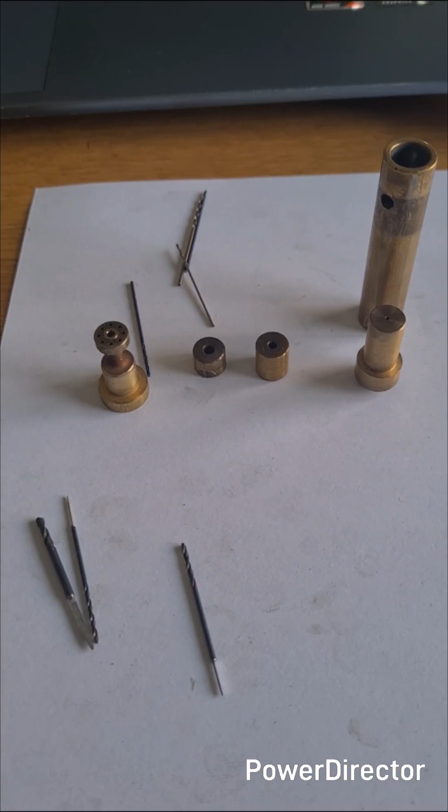It turns out that the back pressure valve, which I was using, a back pressure of 170 psi for a boiler pressure of 150. Now I kind of worked this out because, you know, friction in the pipes and raising the ball valves and all this. I wanted a 15% over, so that came out to 172.5, but you know, can't quite see that on the gauge, so I just went for 170.

It turns out on the actual engine, when I measured it, as you saw, the back pressure was pretty much dead on. I assume once the injector lifts the balls, the momentum of the fluid actually makes it easier for the fluid to force into the boiler and keep the ball valve open. All the boiler's got is static pressure pushing on the ball, but the injector has dynamic pressure.

So yeah, it turns out all I needed was 150 psi, but that extra 20 definitely paid dividends to have. It gives me not only more head, but it gives me easier starting, it gives me a wider range. So yeah, this is actually the design on CAD.

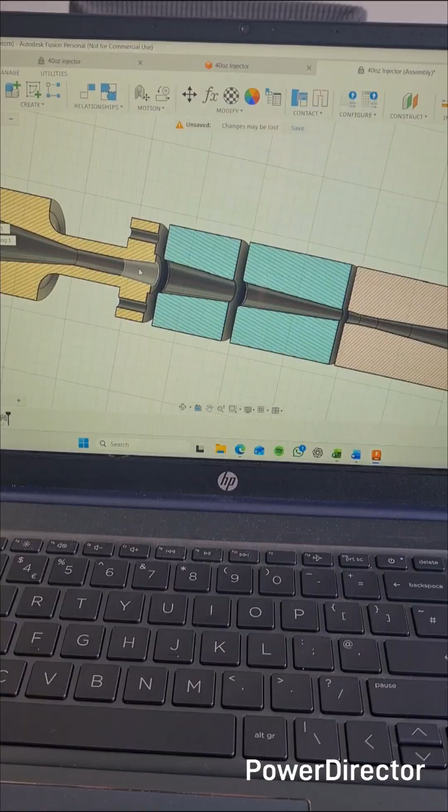Got a 13 degree included, and these are all included angles. 13 degree coming into the steam nozzle. This was from Dag Brown's. I actually needed 1.3 mil steam nozzle in the end. That was calculated using thermodynamics. And then I've got a flow straightener here. This isn't as long as maybe it could be.

It's supposed to be 4 times the diameter, but I was opening it up slowly, making it longer, but then, you know, it was working, so don't fix it if it ain't broke kind of thing. I left it as it was. The land on the steam nozzle is maybe a little bit long, but it definitely aids in straightening, as you'll see on the test rig.

Next we come to the combining cone. This ended up being 8 degrees. You can see I have chamfered the inlet slightly, but hardly anything. I mean, the actual nozzle is hardly chamfered at all. And then on every outlet I've done an absolute tiny radius, which stops any shear layer forming or reduces any shear layer.

Now we come to the condensing cone. I've got the Linden Secret, as they call it, on here. All it is is a slightly larger radius entering. It's just to stop any splashiness, because when the water and steam are mixing in this cone, it gets to the end of here, it's still not fully condensed, nor should it be, because it's still got this whole length to go before it condenses. It means that you're going to have steam which wants to expand as soon as it meets this area.

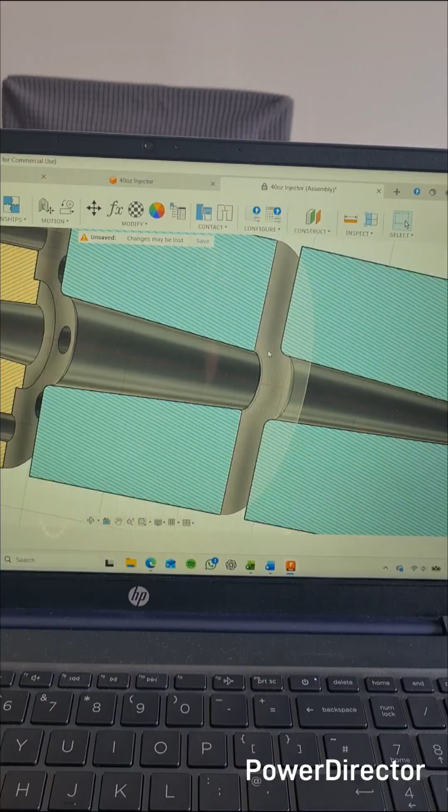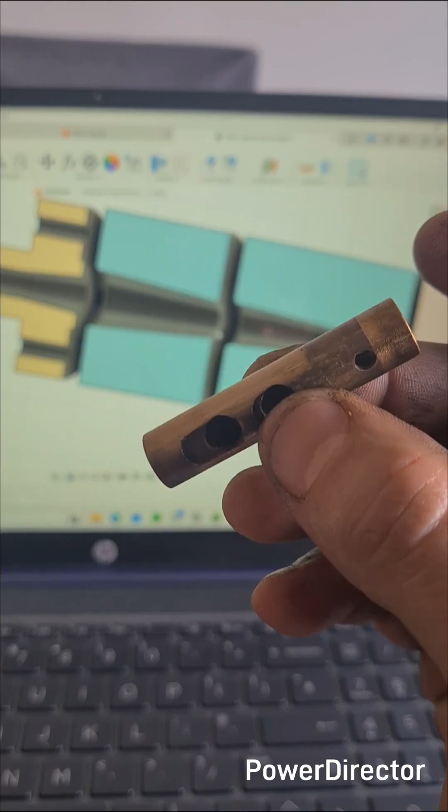This is the overflow 1 gap, which actually meets this hole here. When the injector's working, this is under vacuum, but it serves as a starting gap to allow steam to escape as the steam nozzle allows steam through here. Velocity increases. Velocity so high that right at this edge, you're capturing something around 0.8 bar, which is 0.2 under atmospheric. That draws water in. As the steam hits the water, the steam condenses extremely rapidly, causing even more vacuum, which self-perpetuates the inlet.

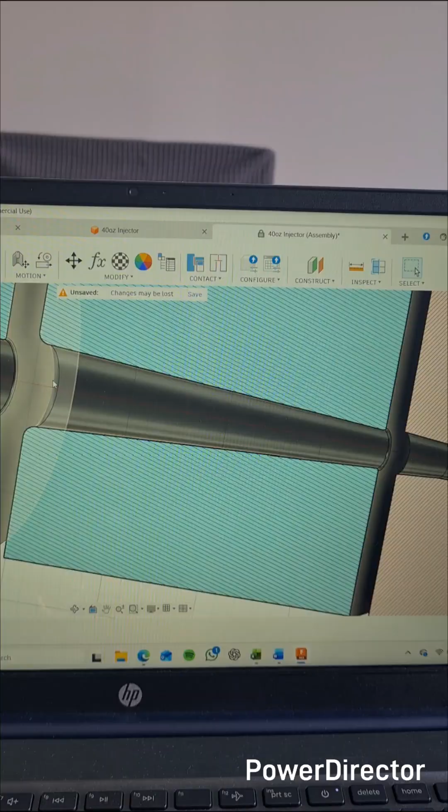But yeah, there is still steam at this point, so it does want to expand, so this Linden Secret just helps capture that. The condensing cone is, as you can see, quite long. A lot of books that I've read, a lot of literature say that this entire section wants to be between 4 and 12 lengths of this diameter, which is the condensing outlet. So that's easily that. And at these high pressures, it really does need it. 150 psi really did need that length to get the steam condensed fully.

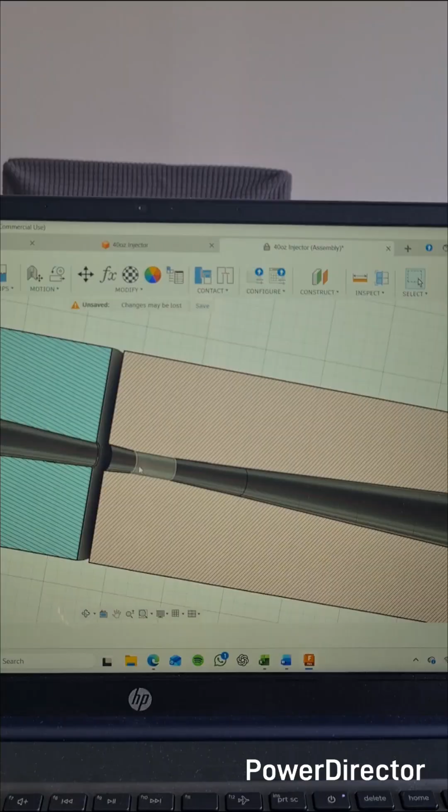Temperature I have on outlet is around 75 to 80 degrees, which via the maths shows that the steam is then fully condensed and the water's done its job. Next we come to the diffuser. As you can see, I've got a small 9-degree inlet taper. This is completely different to Dag Brown's big bell mouth entries.

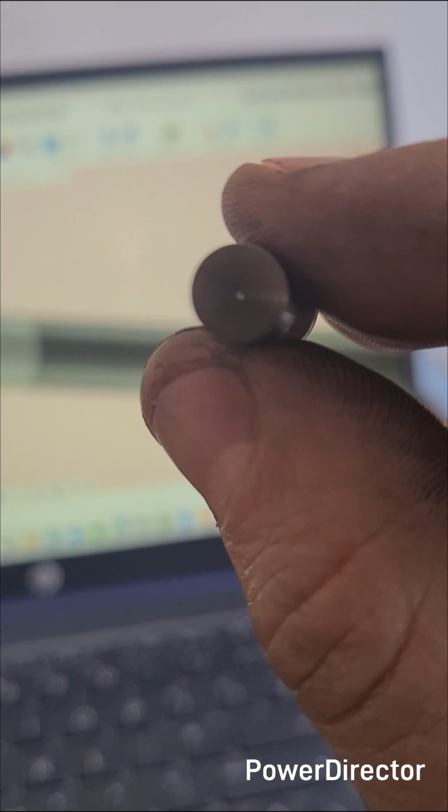You can see there, it's absolutely microscopic once you get to this end. The water, as I'll call it, because it's pretty much single phase. There's tiny pockets of steam at this point, but they've pretty much been condensed by now. And if they haven't, then they cause turbulence in here. So you want this length to ensure that steam is fully condensed before it enters this, because this is now compression. The water's moving at around 40 to 45 meters per second through this throat, which is only 0.82 millimeters.

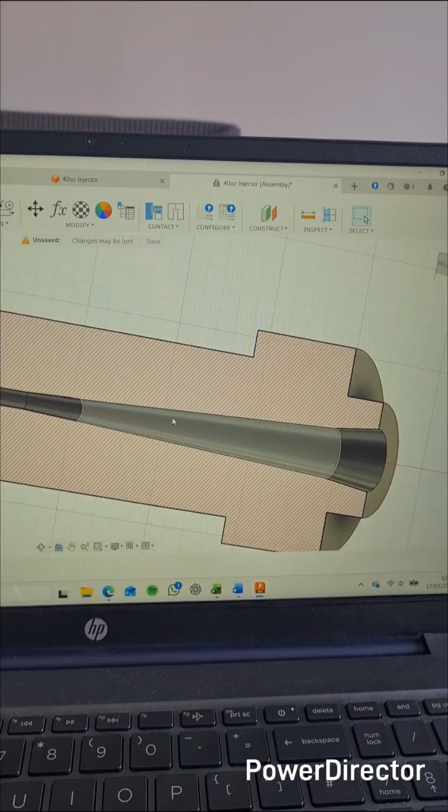We then have a 3-stage diffuser: 5 degrees, 6 degrees, 13 degrees. Strickland Kneass experiment with a radius, which for higher pressures should be up to 300 times this diameter. It's kind of difficult to make in the home workshop, so going with 3 diameters makes it easier.

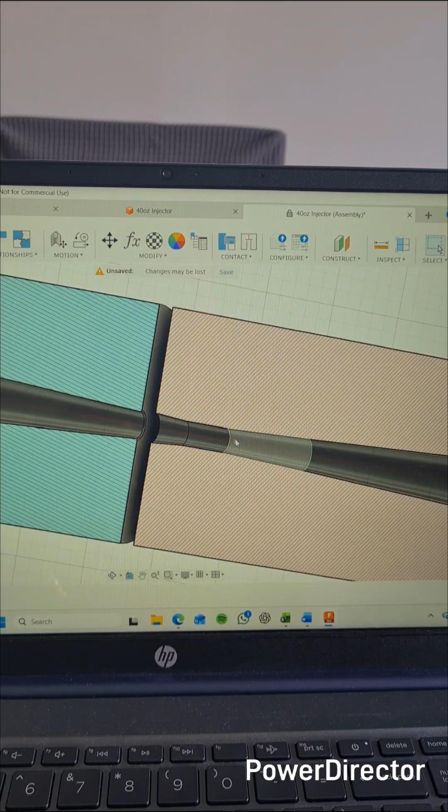It stops boundary separation. You want the fluid sticking to this wall and moving outwards. You don't want a jet coming out of here and just detaching from the wall. You want it sticking to the wall and slowing in speed gradually, so that you have a pressure front inside this nozzle, not inside this throat or in here, which with slower water you can have, and I was getting a hell of a lot of overflow coming out of OV2 here, overflow 2, which is the second hole.

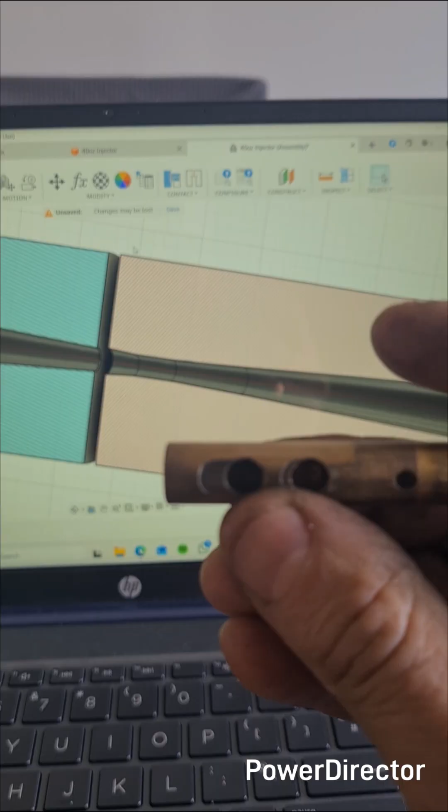As you can see, this is quite a different design, a lot longer, a lot sleeker. And this was the Dag Brown version. As you can see, he also uses annulus regulation. Nothing at all wrong with this. It just means that you are losing some of the condensing cone. All of that from there to there is lost length, lost condensing potential.

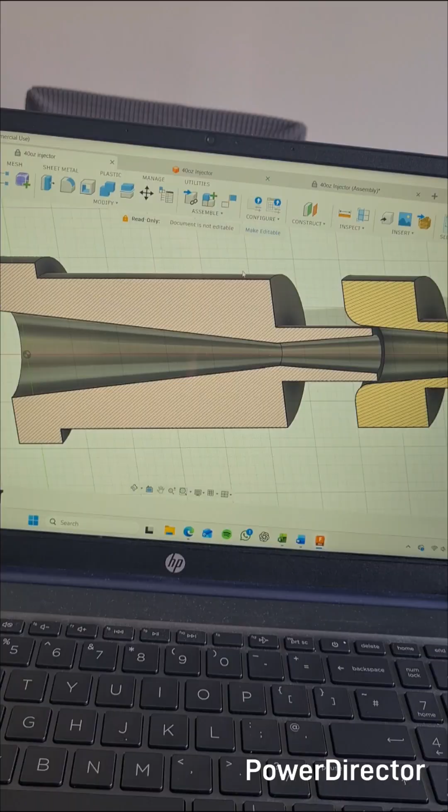Also, trying to get this bore lined up with this bore when you rotate it. Even if you clock, you turn all this, that's all great. This bore is perfectly concentric to this, concentric to this. As soon as you flip it round, this is no longer concentric. Even with the 4-jaw, you can clock in on this end, clock in here. It's still not going to be perfectly concentric with this bore.

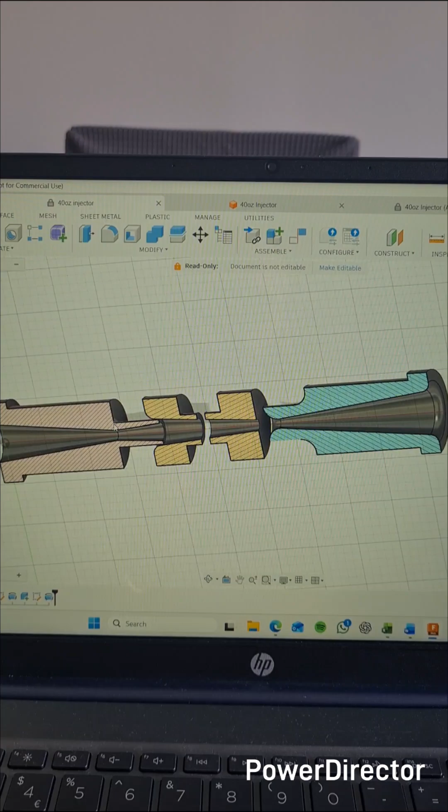So this can be 0.01 millimeters offset, which does in fact cause the steam to exit at an angle and hit the water at an angle. When it comes out of this nozzle, it will be at an angle. Now this is why Dag Brown uses a larger radius bell mouth entry. It's because on these lower pressure injectors, the steam will be at as high a velocity, but the water coming out of here won't be. You don't need as high a velocity to beat the boiler pressure.

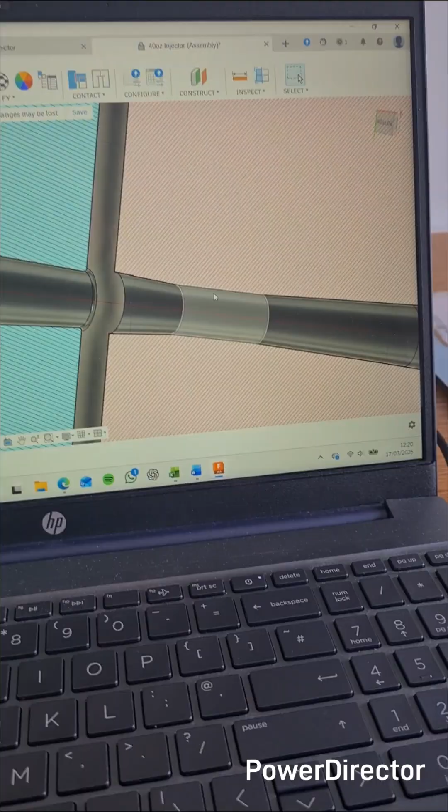And so not only is the jet not at such an angle, but the diffuser bell mouth can capture it easier. Now, why haven't I used a diffuser bell mouth? Well, as the water's exiting here, any gap between the water and the wall is actually causing a vacuum. So you're drawing air in here. And this causes air entrainment. You're trying to compress a fluid, you're getting air entrained, it becomes more compressible, I should say. We don't want it to be able to be compressed. We want it to be raising in velocity, not compression.

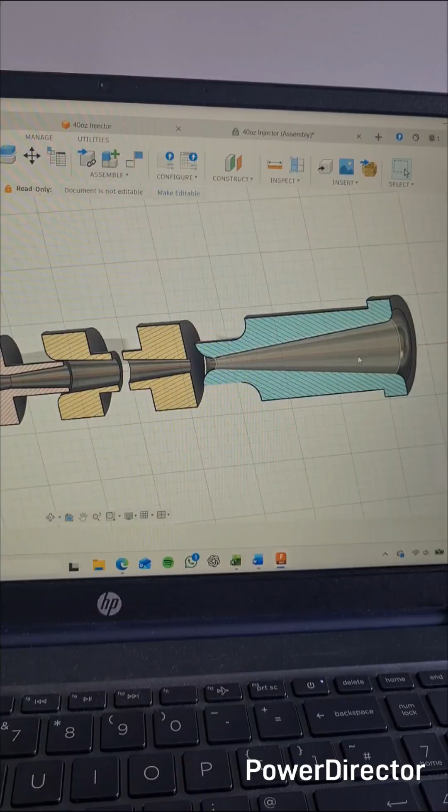However, with 150 psi, that 30 psi makes such a difference. You can have more heat for the water to condense. The steam's still going to be moving at a similar rate of knots, as I've shown in the maths.

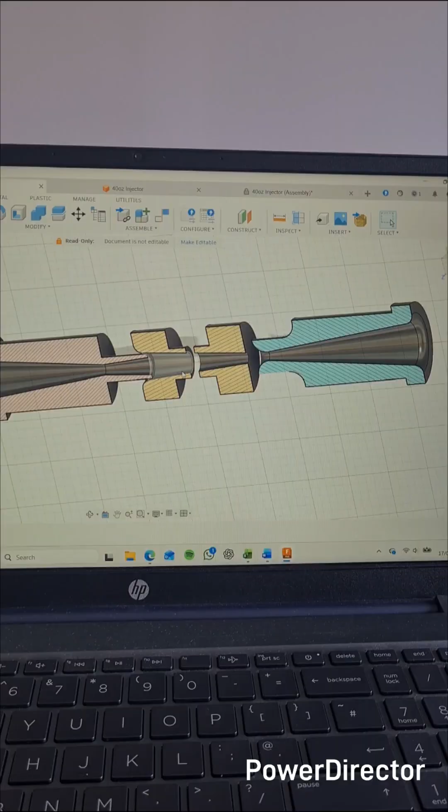Which, if anyone's interested, I can show. But I'm actually writing a book at the minute on all of this, how the maths designs the steam nozzle, and from that how you get the condensing lengths, and then how you need to size the diffuser nozzle. It's amazing to think that 1.25 litres of water can flow through a 0.8mm hole in a minute. But there we are. I suppose when it's moving at 45 metres a second, it will do.

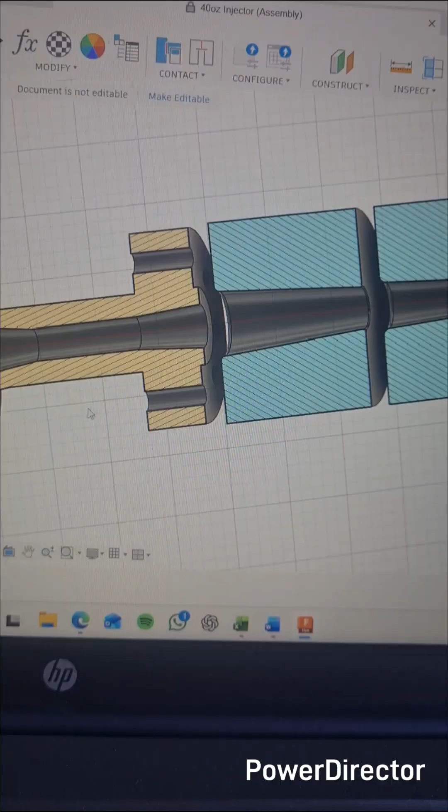In summary then, when steam's on this end, it's very high pressure, very low velocity. As it moves down this cone, the velocity increases, pressure reduces until it hits the steam nozzle. This is where the steam will be doing Mach 1, so that's the speed of sound in steam, and this is called a choke nozzle. This means that nothing you change past this point will change the velocity through this nozzle.

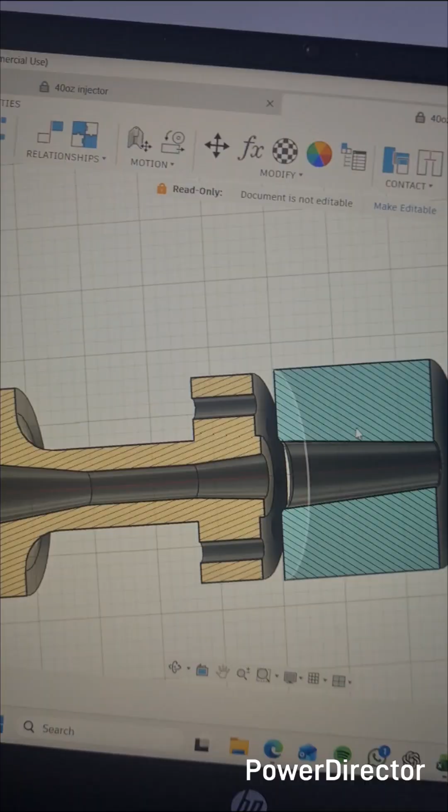So nothing downstream, no extra water, no change in water temperature, no change in gaps, no difference in angles will change how fast the steam is moving through this nozzle. And that will be Mach 1, which is around 450 metres a second. Now that won't reduce your pressure enough to actually draw a vacuum at this point. You think you're at 150 psi at this end, which is what, 11.5 bar. By here, the maths says you're at around 6.5 bar. So you've halved in pressure, but you've dramatically increased the velocity.

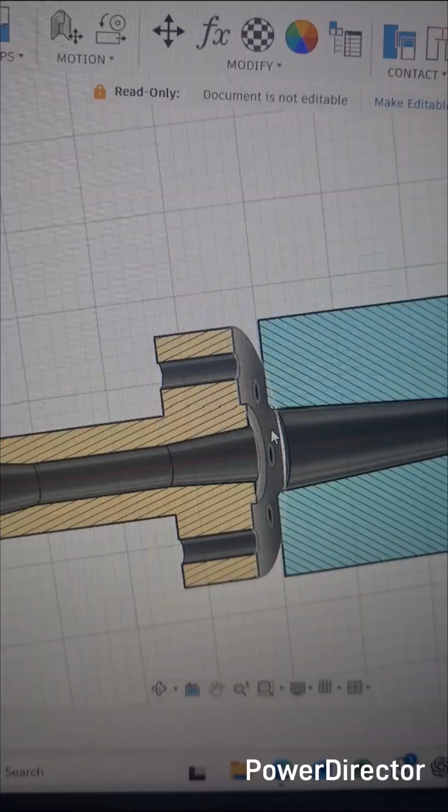Now the flow straightener, this is what this does. It allows the steam to expand, raise velocity, and drop its pressure more. This means that, as I've said, at this point, right on this edge, the steam will be moving at around Mach 2 to Mach 2.5. That's 2.5 times the speed of sound in steam. And this is why you get just under atmospheric pressure at this point. That allows water to be dragged up or lifted into this axial gap.

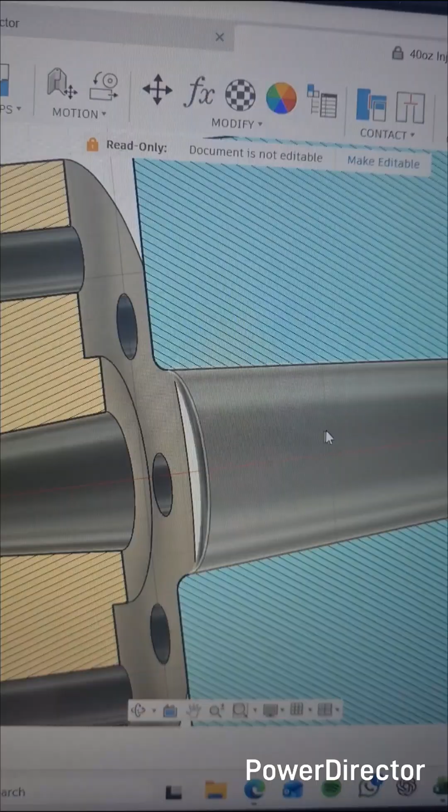And then, as obviously the steam hits this wall of water, it condenses extremely rapidly, causing a larger vacuum to be created. The combining cone does the initial job of combining that steam and water, so you're going to have water on the outside, steam jet on the inside, combining here. If you didn't have the condensing cone, you'd see a very hot jet of water and steam exiting here.

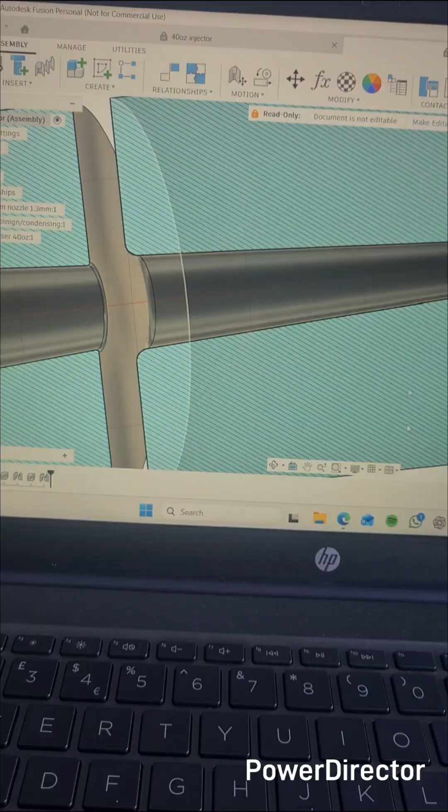The condensing cone then does the final condensation and also carries on raising the velocity, because the steam now is losing its velocity to the water, but the water obviously is taking up heat, and Newton's second law means momentum must be conserved, so the energy has to go somewhere, and that energy goes into speeding up the water. And by the time we get to the end here, the steam and water are balanced at around 45 metres a second.

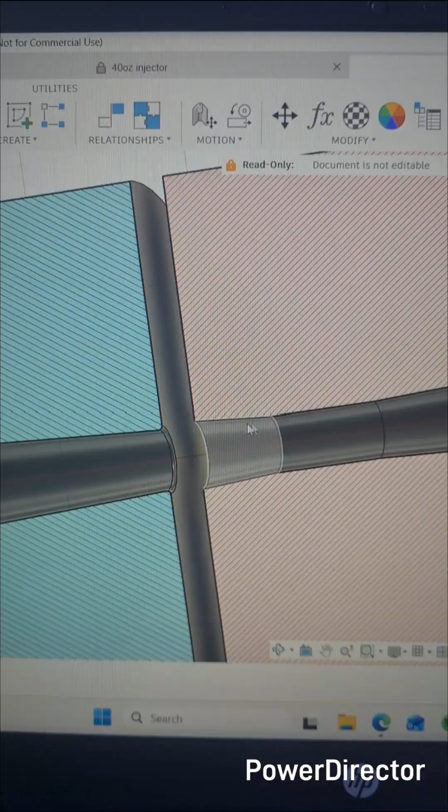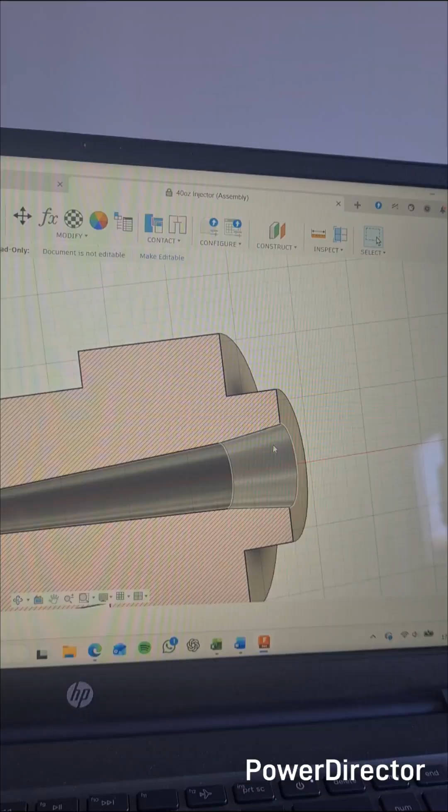As I've said before, the capture taper allows the vena contracta to contract into this space without entraining too much air, which is compressible. We don't want compression, we want velocity. And the land here allows the vena contracta to stabilise before being re-expanded. As it expands, it slows down, and as it slows down, it re-raises in pressure until the end when it goes into the boiler. If you ever try one of these, be prepared to make some of the smallest tooling you've ever made in your life.

These are D-bit reamers. This was a 0.78. This was a 0.8. And then this was a 1.3. You can find reamers online on a place like Cutwel, but they're going to charge you 30 quid a reamer for something like a 1.3. Even more expensive for a 0.8.

So I got the Dremel on the lathe and made my own D-bit reamers, and yeah, done a really nice job. Also, as experimentation goes, I made a hell of a lot of tapered reamers. I actually found that grinding old HSS drills is the way to go, rather than trying to turn ones like this.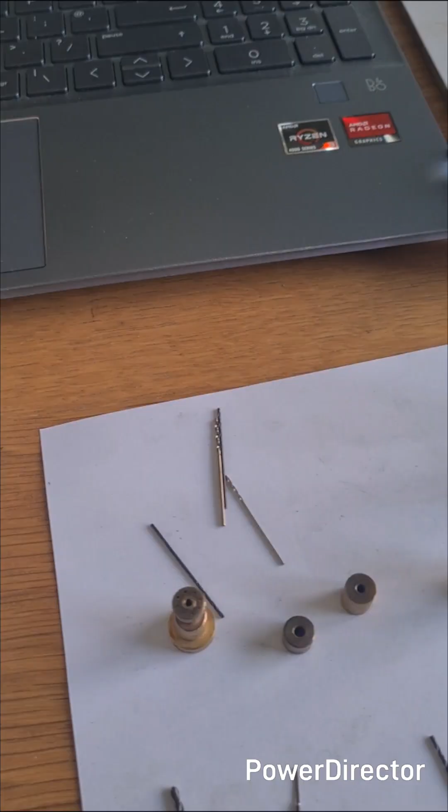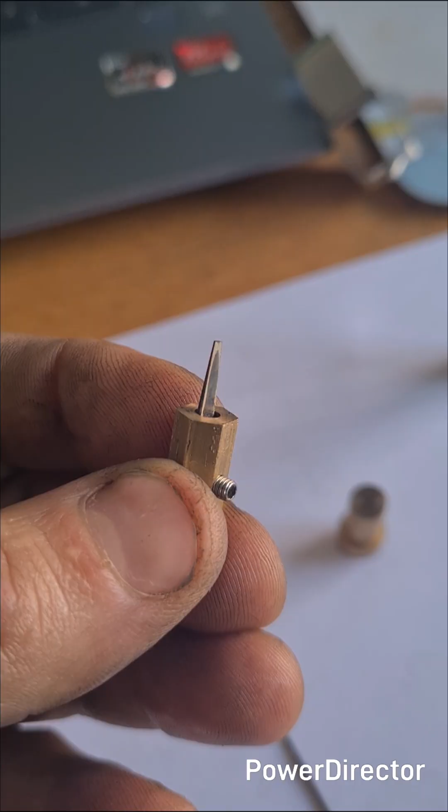This is good for bigger ones, but when you get into the much smaller sizes, an HSS drill ground at an angle is far better, it's far superior.

Something else people would be questioning on this is the steam nozzle, why I've got these holes surrounding it. Well, this disc is actually a water flow straightener or killer. Originally what was happening was water was entering here from one side and actually causing, I don't know what else to call it other than turbulence, and a one-sided jet, which added to the steam being offset, and caused the jet to be coming out of the condensing nozzle at an angle.

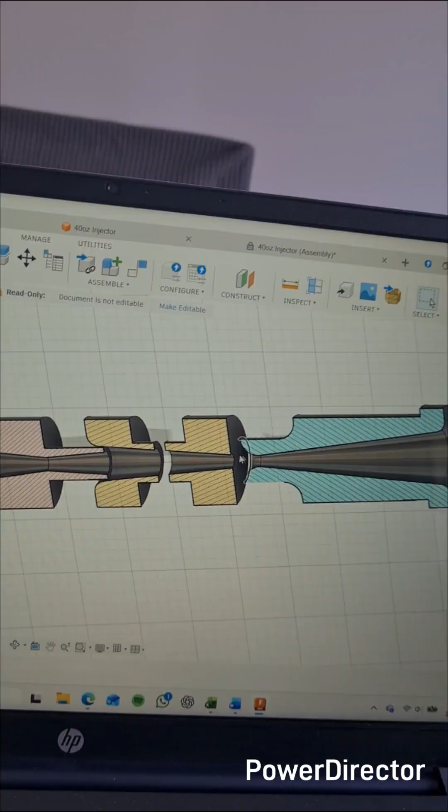Now, although this angle was only probably 2 degrees, it was the best I could measure, that's still 2 degrees offset, so when it hits the diffuser, it's then bouncing off one wall more than the other, causing more turbulence, not allowing the water to stick to the walls nicely. So when I then upped the pressure, it was even more exacerbated.

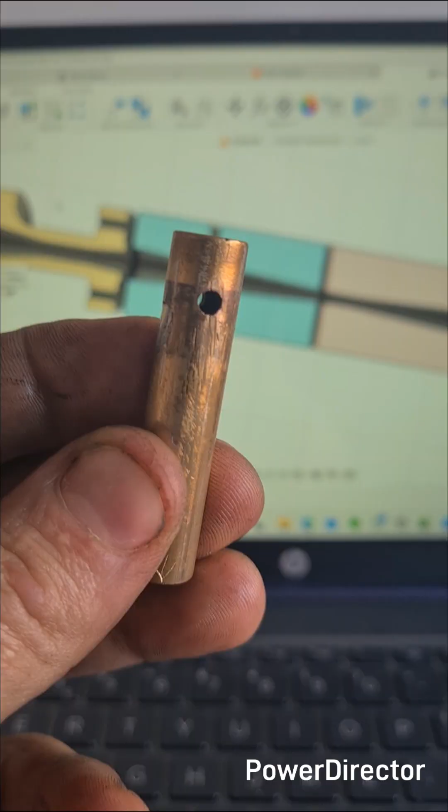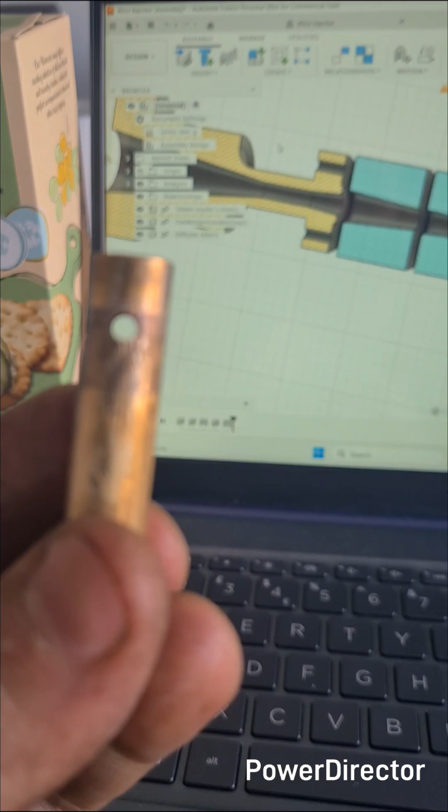So what the water does now is it comes into the injector body around an annulus and into these two side holes. Now you'd think that these two side holes would then put the jet perfectly against the side of this, but no. I think what was happening, because it comes still from one side, the jets were coming in at an angle. And you can see the old hole there,

but they were coming in at an angle and still causing, even after all this length, the jet coming out of here, because it was such high velocity, to still be at an angle, and you could see it when I had different diffuser geometries. You could see it sticking to one side of the wall there. So what I had to do was then add this flow straightener.

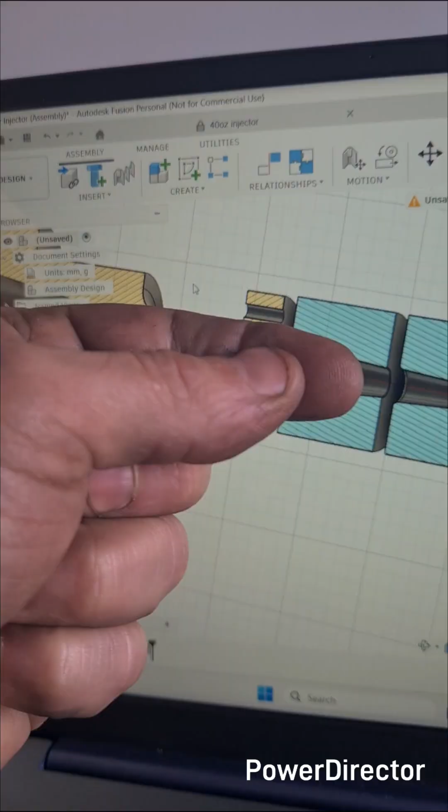So this then acts as a plenum chamber. So even if the water is coming in at an angle, it has to raise in pressure here, which then these 8 nozzles then direct the water square to the axis in 8 locations, and that has actually killed the angle completely.

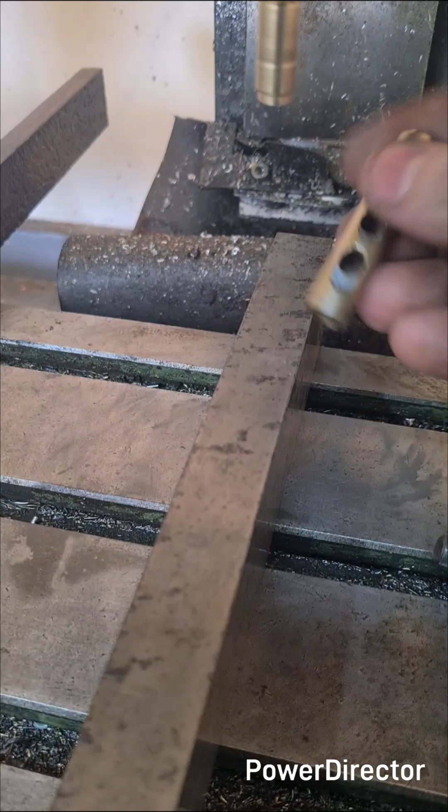It's so important when pressing these nozzles in that you keep them perpendicular to the axis or perpendicular to the walls. Even though this is a press fit in this bore, it can still press in at an angle and not be perpendicular if the face of the tool you're pressing in with isn't perpendicular to the wall, or there's a bit of swarf under here, or the tube isn't square. It's plagued me the whole way through, squareness and keeping things axial.

As you can see, pressing this in, this tool is actually a really nice close fit on. See, it's holding itself there. It's not a press fit. It's just gripping it enough so that I know that there's no axial play. So when I press this nozzle in to this shoulder, I know not only is that nozzle where it needs to be, but it's also exactly axial to the bore of this.

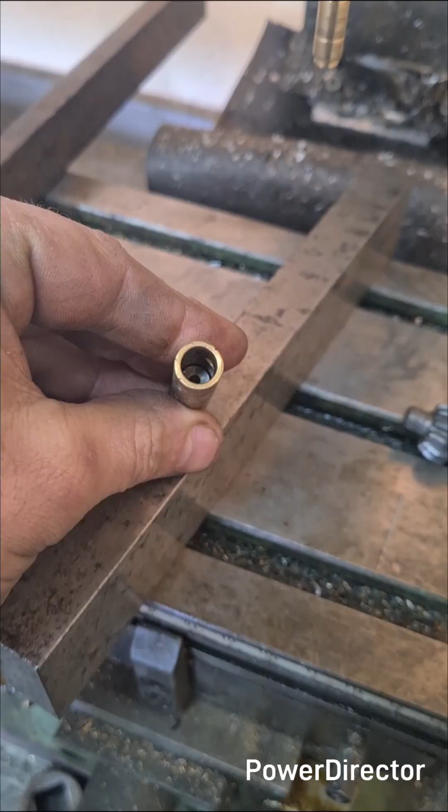What I'll often do is also give it a turn, make sure it's clean on the bottom, a bit more of a press in, give it another turn, and that just ensures that the tube is flush with the square block there, the precision block, and then I'll just push it home to the shoulder. Now I know as well as I can that that cone is square in the bore and square to the exact centre of the tube, which will hopefully allow the jet to be central too.

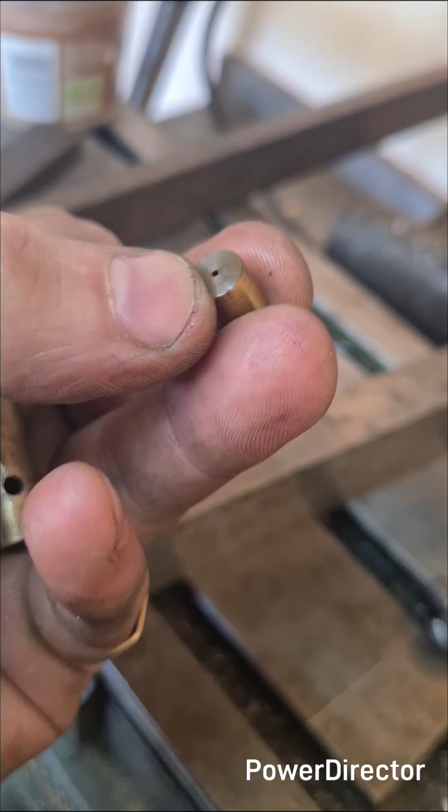Ensure the tool you're pressing in with doesn't have a completely flat face. Look, it's got a hole in the face so that when I'm pressing in these cones, it's not going to interfere or cause a burr or push over the edge of that hole. I mean, that's 0.9 mil. It's absolutely tiny and easily damaged.

The next thing to note is the gap between these two cones.

It's a little bit of experimentation, but you can kind of logic out that at this scale it's not going to be a massive gap. You're not going to have a 2 mil gap, but the gap needs to be big enough so that the initial steam can escape. I actually found that 0.8 mil is the perfect gap.

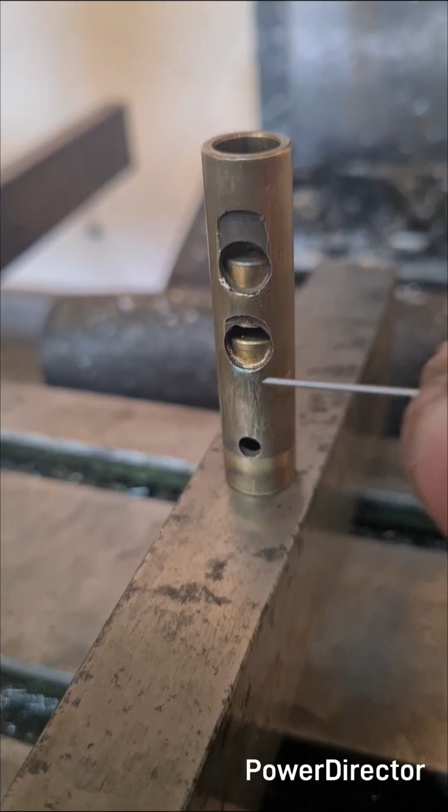The CAD model can help you with this, kind of show you that somewhere between 1 and 0.6 the angles intersect, and the angle from the combining cone allows the water into the condensing cone.

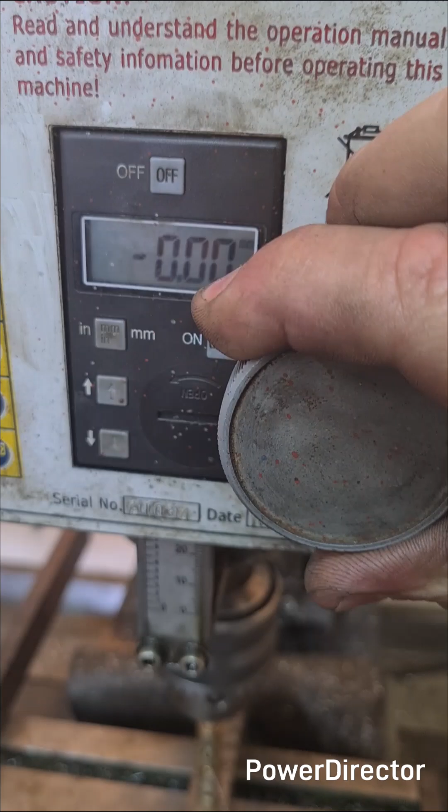So what I use is, I've got a 0.8 drill here, and that goes in there. As you can see, it's nowhere near yet, so I need to keep pressing it down until that just touches. To help me do this, I use the mill's quill feed here. Getting pretty close now. So what I'll do is I'll give it a small, and I'll give it another jiggle around.

With doing this, you can easily overdo it and grip that drill piece. And gripping this drill piece means that this cone or this cone can now be off centre, because although this is pressing this square, you've now applied force to this bottom cone via one side with this drill piece. Be very careful when pushing these in.

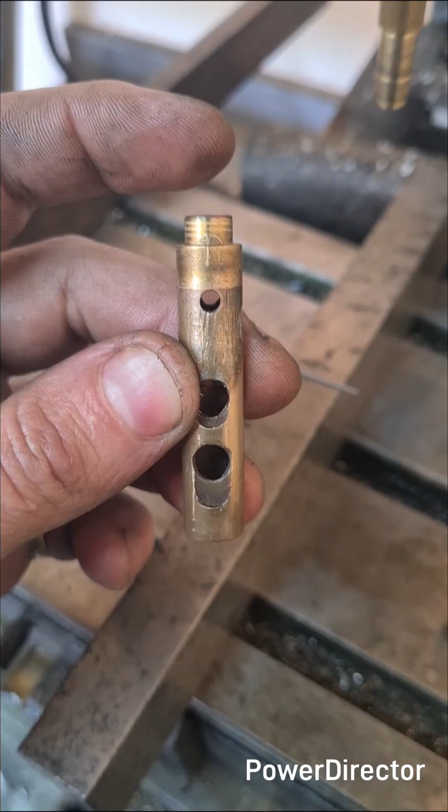Eventually you'll have to take these cones out, whether it be for cleaning or whatever. I've had to take them out today, obviously, for measurement, final checks and stuff. So just make marks where you can ensure that the alignment going back in was where it was before. That's marked, and the condensing cone's marked too. There we have it.

The 0.8 drill barely goes in there now, so I know that gap is just under 0.8, which was about perfect before. Unfortunately, there's no way to know whether you've got the cones in perfectly until you go on the test rig. Once again, when pressing into the bore, make sure that the alignment's correct.

It's easier for me because I've got larger holes into the overflow channels, but your injector may have smaller channels, which means that that alignment really needs to be perfect.

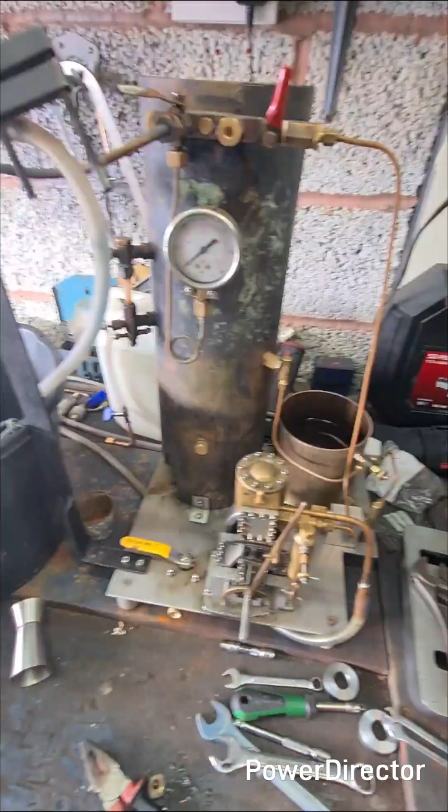So before we start, a few notes on the boiler test rig here. This is an engine I made back in college. It's a two direction single cylinder. It's simple, but I hooked it up to a small water pump. I've got feed into the boiler, so I can keep it topped up with water. I've actually rigged a gas burner, which I hook up here.

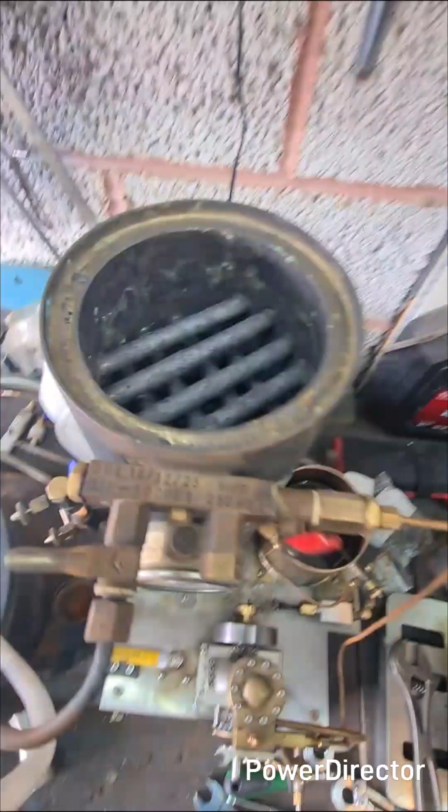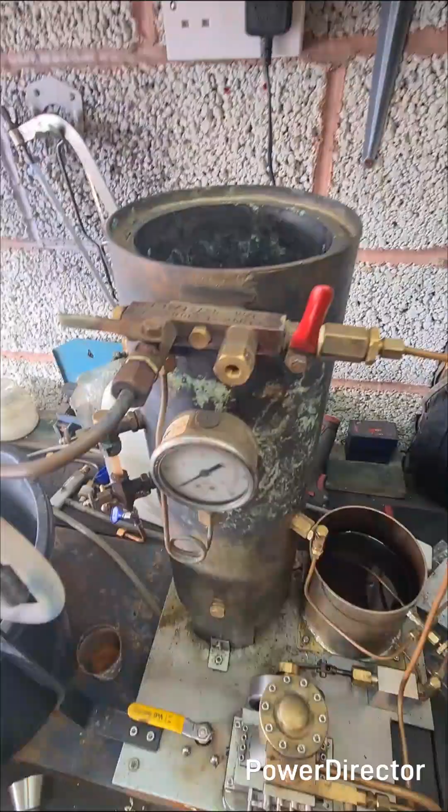It's a cross tube boiler, and when that flame's roaring, you can kind of hold your hand over the top here, so it's really efficient, effective. Water gauge, and as you'll see, I do not have a safety relief valve. I could easily fit one here or here, but for testing injectors, you don't want your safety relief valve going off all the bloody time. It's just an absolute nightmare to keep track of. You just want to be able to build pressure, set to a range, and allow the injector to test.

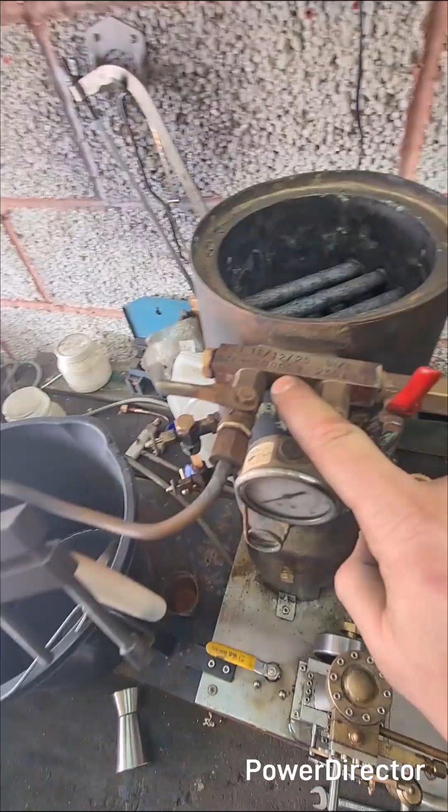Now you could probably get a safety relief valve, maybe relieving at 250 or something, but I tested this boiler up to 500 psi hydraulically, so I know it's good for at least 250, and I never even get it there via these tests. This is a 150 psi injector. The most I'm testing it up to is 170, so I've got loads of safety margin there. And I expect this thing could go up to 1000 psi easy hydraulically, probably 500 psi with heat without splitting or anything.

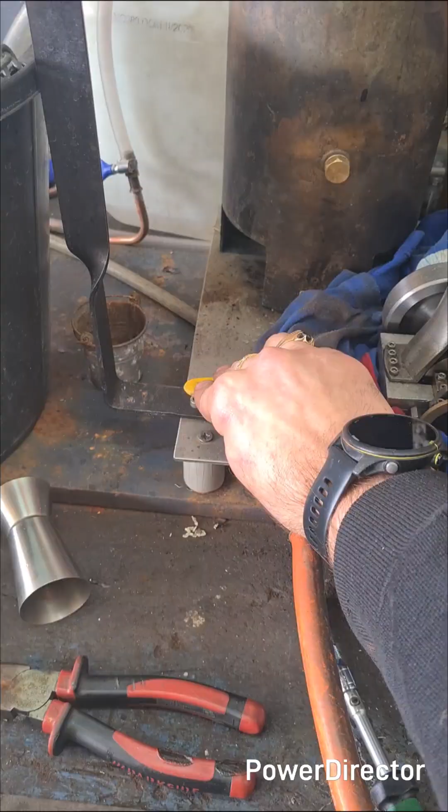So this is 5 minutes in now, 6 minutes, and we're up to 100 psi. As you can see, these valves are getting a bit old and knackered now. I just ordered them from China as quickies. I was experimenting with an upgrade, but they've done the job so far. And as you can see, I'm not really going to give it more, but there's no need.

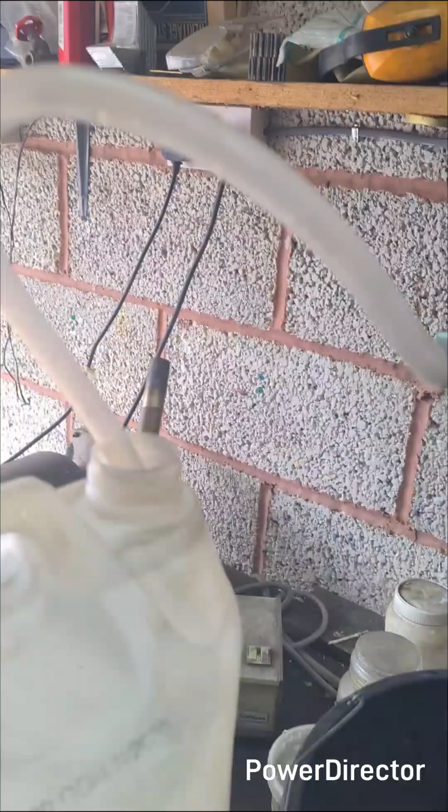We're up to 120, just about to test for the straightness of the jet. I do this just with a rule lined up with the body, and it's actually impressive how cohesive the jet that comes out of the combining cone is, really. So at 135, and to get the line primed, I usually just give it a little bit of steam now.

I'll come up to 150. This is where the balancing happens. You want to be able to balance the flame, keeping it at 150, and the steam use, so that we can leave that and then test it.

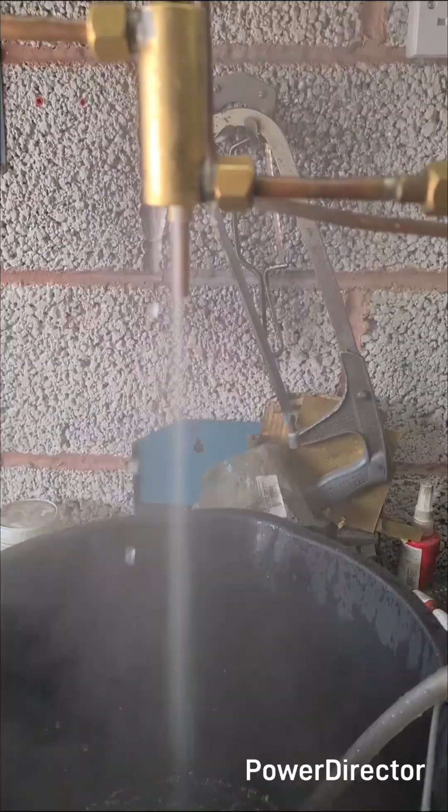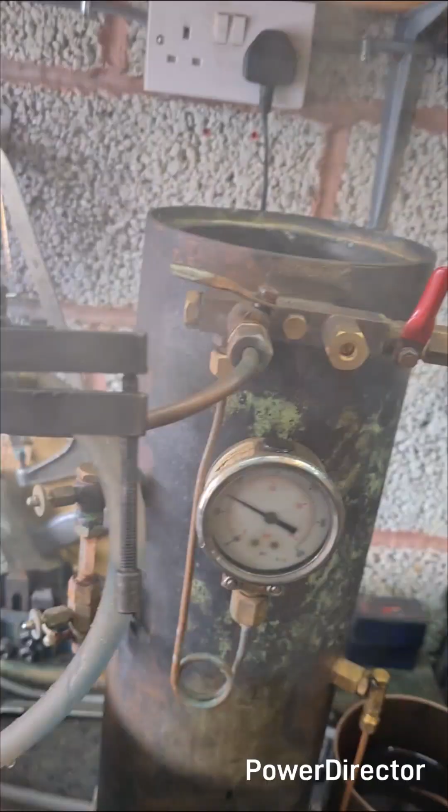See, the jet is still straight, even with the diffuser in. And most importantly, with no load, the overflow 2 was dry, which means that that little 9-degree capture into the diffuser's working. So we'll just top off the water and then put the bottom bung on and see how she fares. So I've primed the line, I'm getting her up to 150, and then what I'll do is I'll start back pressuring and see what reading we get.

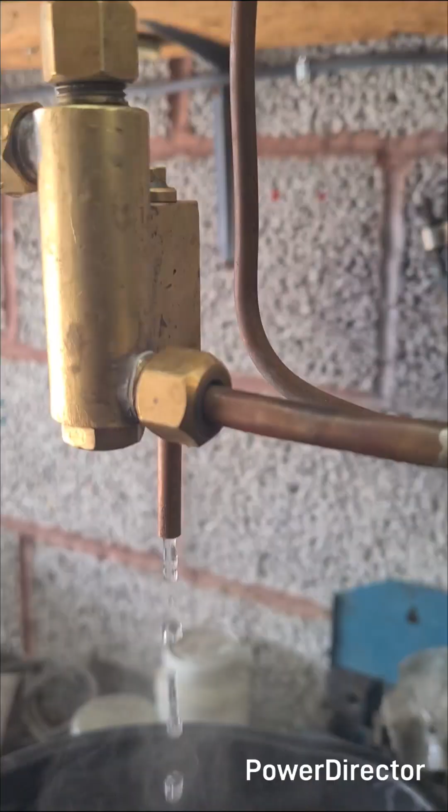This is just to hear how quiet it is. Oh my! Just so you can hear what the actual injector sounds like. It's absolutely quiet in operation. It draws the boiler pressure down quite quick, but that's the noise of it. Absolutely nothing. No chirping. Alright, we now need to top the boiler level up, so we've got the steam engine running.

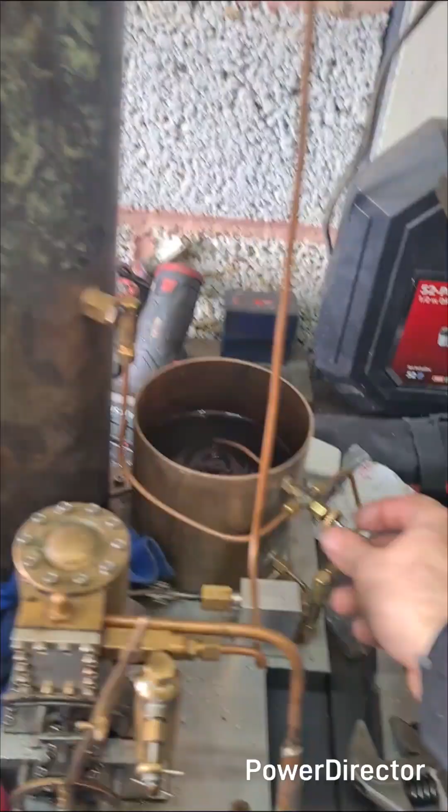Nice and slow. While we wait for the boiler to top up, I thought I'd say a bit more on the design cycle of this injector. While trying to design it, I went through about 120 design iterations. In the beginning I was trying to up the pressure of a fully working Dag Brown design. I realised after a while though that merely reducing the steam nozzle diameter wouldn't actually raise the pressure, as some might think it does. As we've seen, the steam nozzle is actually choked, it's at Mach 1.

So reducing the diameter, all that actually does is reduce the mass flow of steam, i.e. the amount of steam passing through the nozzle. Obviously less steam means less power, but I didn't realise this until later on, as I tried to make the condensing cones and diffuser smaller to match the size of the steam nozzle. What I realised in the end was that the amount of water I want to be pumped in the boiler needs a certain amount of steam to raise its speed, and vice versa, the water condenses the steam to a required level of heat. You can actually use these values to calculate the size of the steam nozzle required for the amount of water you want pumped.

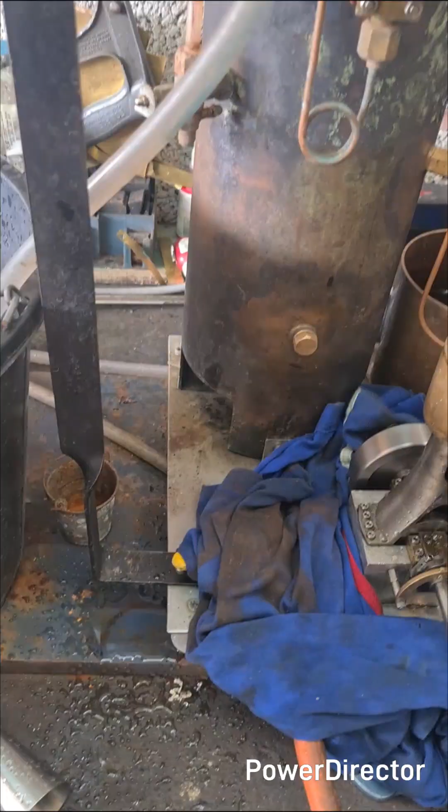And from there it's a case of calculating how long the steam will take to condense and the size of the condensing outlet. The condensing cone outlet then sets the speed the water is travelling, that's if all the steam by then is condensed, and the angle of those cones are set by hundreds of years of empirical evidence. Strickland and Rees do really good work on those angles. So once you have the condensing outlet, which in my case was 0.9, you then get a range of sizes to cut the diffuser inlet. From Strickland and Rees, they give a range, a ratio you can use to work out the diffuser. Mine ranged from 0.68mm to 0.9, which is helpful, but not that helpful.

For instance, when zeroing in on the diameter, 0.76mm was too small and would create overflow because the vena contracta coming out of the condensing cone couldn't actually fit in there. But 0.84 was too big and the injector wouldn't actually create enough pressure. So you really can use the math to get you near, but unfortunately without modern CFD it requires a bit of guesswork and a lot of experimentation to finish the job.